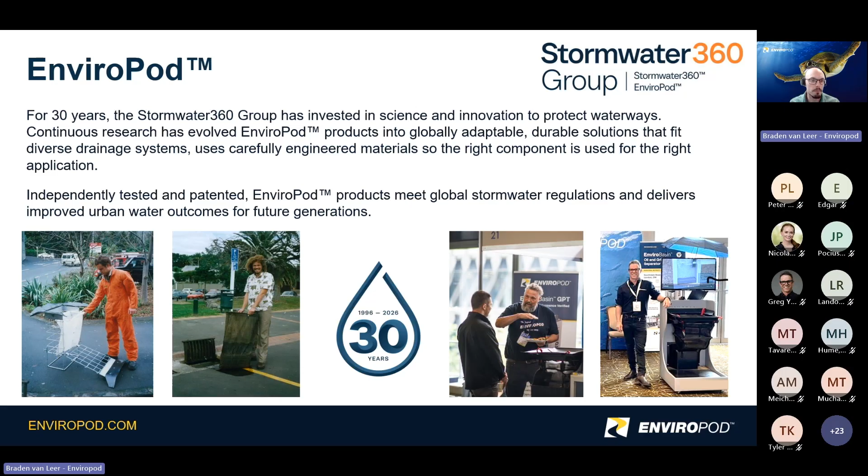And so just a bit about me. I love hanging out in nature, and growing up in Utah gave me a real appreciation for our environment. In my early 20s, I made the decision to go and study in New Zealand, and in my last year of study, I landed an internship with Stormwater 360, which is part of the Stormwater360 Group. As part of the internship, I counted all of the trash that was in 34 LittaTraps over the course of an entire year, and that ended up consisting of over 25,000 pieces of trash, most of it being plastics. After my internship, I got to stay on with the company, and I was designing systems in Australia, Canada, New Zealand, as well as in the US, primarily in California. But now I'm located here in Southern California, and I've become a sales engineer, and I've had the opportunity to work with a lot of great people in a lot of cities since.

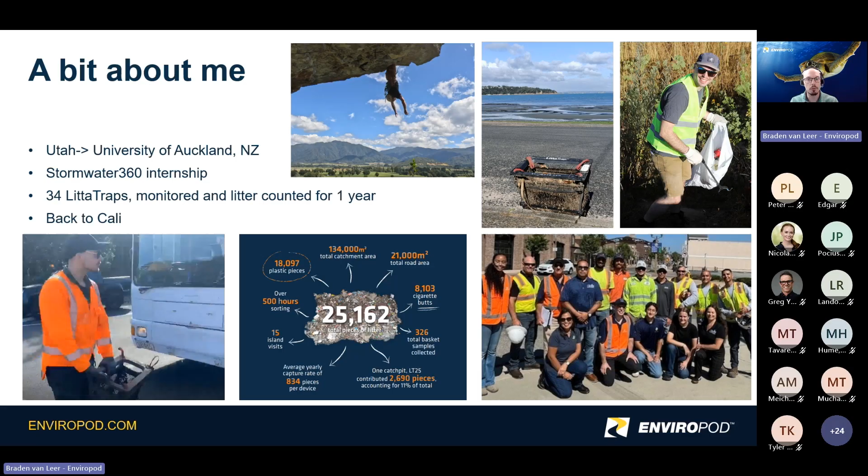But now, so as we start, we want to get into a little bit of regulatory context. A little bit dry for these first two slides, but we'll try and just get through it. But I just want to make sure we set the ground rules properly.

Most trash requirements, TMDL-driven stormwater requirements are ultimately implemented through MS4 permits. These requirements might start as a TMDL statewide policy, local ordinances, or water board orders, or they can even come through in just local design manuals. But the thing is the MS4 permit is usually the main compliance vehicle, and it sets forth the targets for a specific region. And so for California, the nuance is also very important.

The trash amendments apply statewide after their adoption in 2015, but they're not self-implementing. That means they need to be incorporated into the applicable permits. And according to a report by the California Stormwater Quality Association, while many cities are on track, some MS4 permits have not still fully incorporated the trash amendments. And that kind of creates a bit of an uncertainty as to how exactly they're going to comply with this.

Upcoming 2030 deadline. And so part of why I bring this up is, this kind of pressure can lead to quick decisions by municipalities that might not be in the best long-term interest for permittees, and that's kind of why we're doing this webinar, is we're trying to make people aware and give them that information so that they can make sure that they're not saddled with something that's not going to be in their best interest.

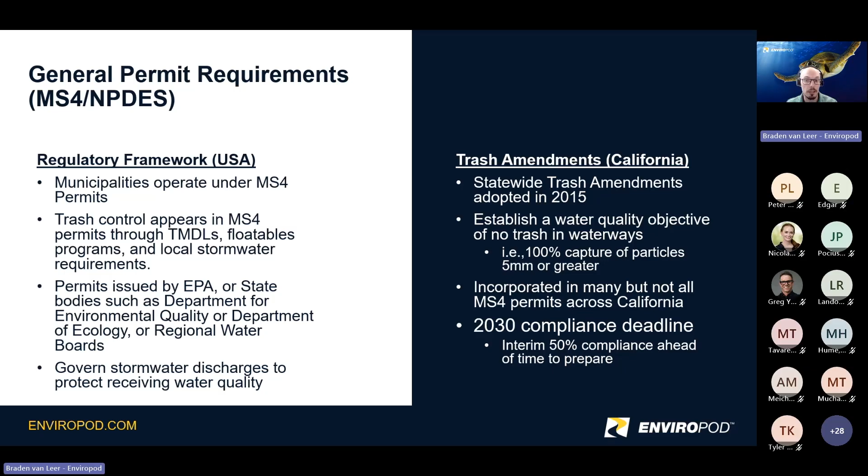And so while many of the California MS4 permits are moving towards regional watershed-based frameworks, there are still differences in how those requirements are achieved. If you can look at Los Angeles and San Francisco Bay, they were early adopters and are now generally understanding and used to the requirements, trash capture requirements under the regional permit. Whereas Santa Ana and the Central Valley are kind of following in the same direction, but they're not quite at the same pace as them.

And they're moving into that regional permit, but for different reasons. So Santa Ana is trying to unify 3 county-based permits across a heavily urbanized watershed, a single urbanized watershed, while Central Valley is using a broad region-wide permit. This way, it creates consistency and flexibility across a very large and varied inland region with a lot of, there are some big cities, but there's also a lot of farmland and rural areas to consider.

And so kind of with this move to regional permits, or with looking at these regional permits, it's good in that it can make trash capture requirements more consistent and easier to document. But it's also good to note that they do raise expectations around planning, monitoring, adaptive management, and long-term maintenance records, which is generally good, but it can be a bit administratively heavy when you're getting that set up.

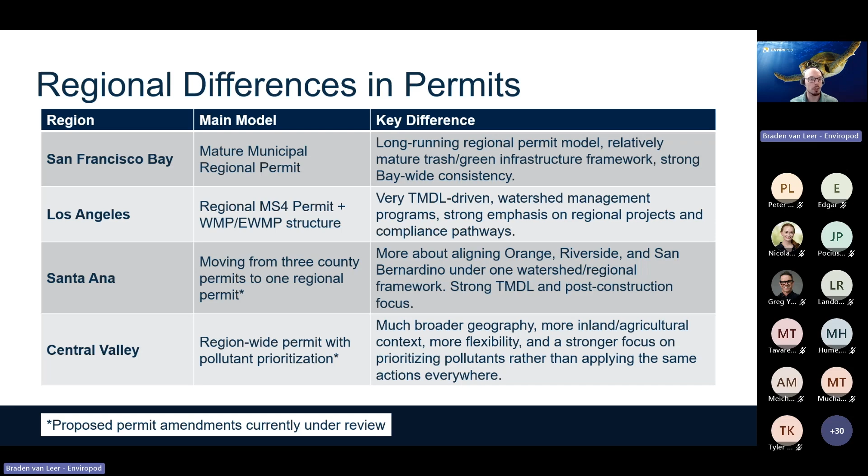Part of the benefit of aligning cities within the same watershed is that the expectations are the same, so you don't run into a situation where one area with a loose or ineffective plan isn't capturing what they're supposed to, and it actually ends up adding the load to somebody else downstream.

And so with this in mind, how do cities typically comply with trash capture requirements? With the trash amendment in California, they're split between track one, which involves using only full trash capture certified systems in medium or in moderate, high, and very high priority land uses that are maintained yearly.

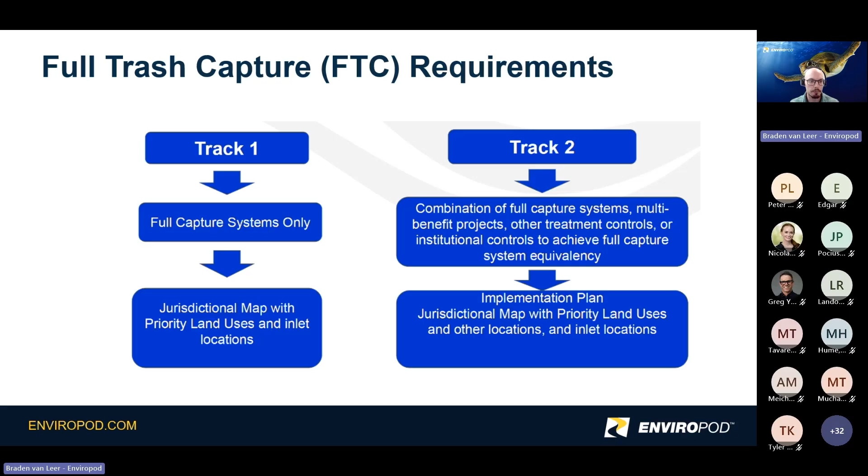Looking at the different full capture device types, there are a lot of different full trash capture devices available, from large end-of-line systems to catch basin inserts like you can see here below. As most cities have their high priority land use areas in existing sites and infrastructure, retrofitting catch basins is often a lot more practical than finding a road that you can dig up to put in a large end-of-line system. And so with this in mind, we are focusing on projects and bids that are utilizing at-source solutions today.

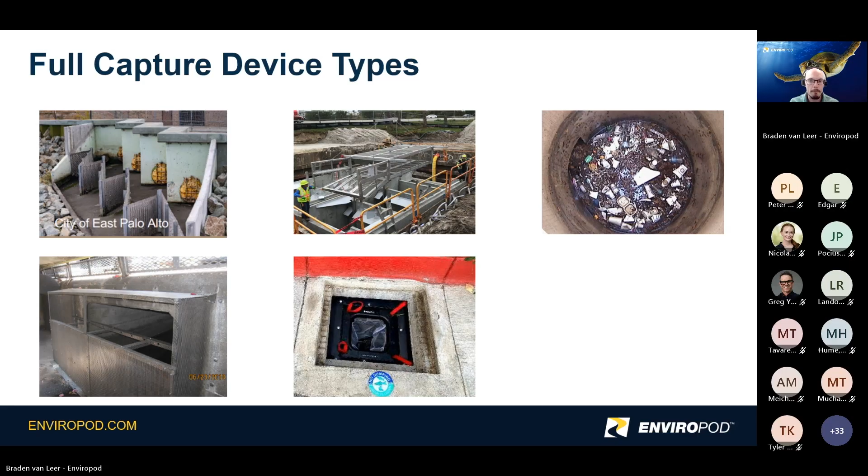Just to clarify a bit more, at-source treatment is defined as just that, treatment at the source. The reason why we here at EnviroPod like it is because this means that the devices are placed in catch basins and they take rainfall runoff and capture pollutants before they get downstream.

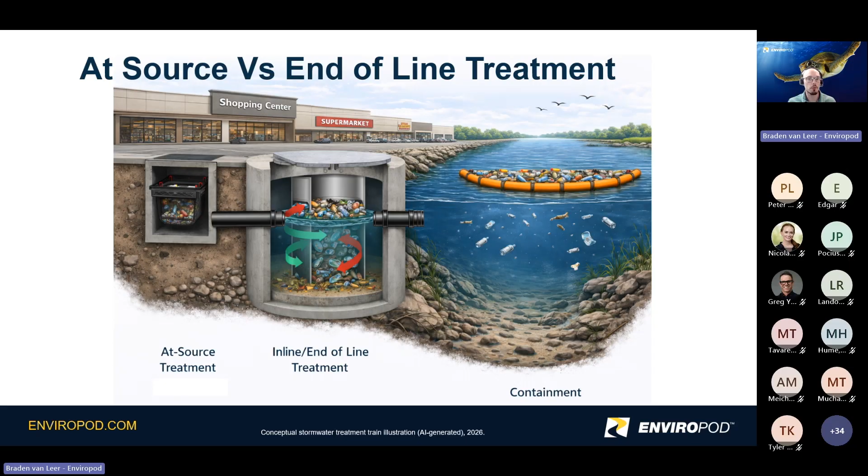While there might be some perceived benefits of end-of-line systems, one of the key differences between these devices is at-source treatment captures material and holds it in a dry environment. We know that when materials are in a wet environment and it's churning and running into each other, it breaks down, and then you can lose it downstream. Also, as you can see illustrated on the right, a lot of material and plastics don't float, and so some systems just won't target a large portion of trash that might be hiding just underneath the surface.

While at-source treatment devices might seem very simple at first glance, there are a lot of considerations that need to go into the design of these products to ensure that the best outcomes and the lowest whole of life cost for these devices is achieved.

It all starts with regulatory compliance. It's a bit of a given since that's kind of the reason why a lot of us are doing anything at all. But hydraulic capacity is a part of those regulations, and it is often overlooked during trash capture projects. Making sure that the devices work to this hydraulic capacity is also a key thing relating to the trash retention, making sure that the devices can actually hold on to the material that they're capturing in typical runoff events. The devices, of course, also need to be able to fit within the inlets and be able to be maintained, and the catch basin needs to be accessible for other maintenance operations down the line.

When you put all of this together, it eventually conglomerates into a durability and life cycle value. So, again, I'll probably say it quite a few times during this, but the whole of life cost is key. You want this project to be successful for years to come because you're going to be maintaining these a lot longer than after they're installed.

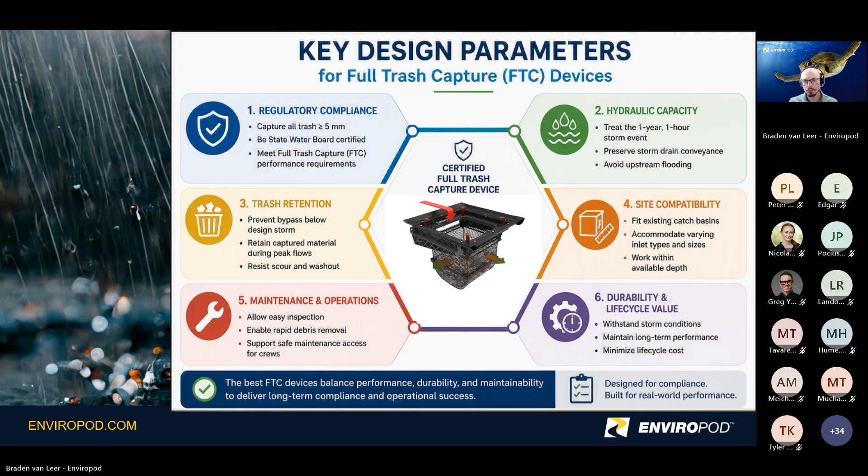Looking a little bit closer at the hydraulic requirements, the California Water Board requires that devices installed in catch basins can capture the 1 year, 1 hour storm. You can think of this kind of like a benchmark storm. Engineers need consistent ways to compare devices, so regulators use what they call the 1 year, 1 hour storm. It's not literally a storm that happens exactly once every year. We know the weather is known for being very unpredictable, but it does mean a storm of that intensity has a roughly 1 in 1 chance of occurring in any given year.

So for trash capture devices, the state water board specifies trash capture flow rates, but it actually doesn't account for peak flow conditions. There's a lot of variability in how manufacturers calculate trash capture flow rates as well as bypass flow rates. So if you have sites that are already prone to flooding during large storm events, you're really going to want to pay special attention to how these devices function and how their flow rates are derived.

If you want more information on this, as well as a bit of a better understanding of how flow goes through these devices, we do have another webinar saved on our website called Standardizing Trash Capture for Resilient Stormwater Infrastructure. It's a very wordy way of just saying that we've looked at the different ways that people can measure flow rates for devices, and we've found which ones we think hold the most true to real world conditions.

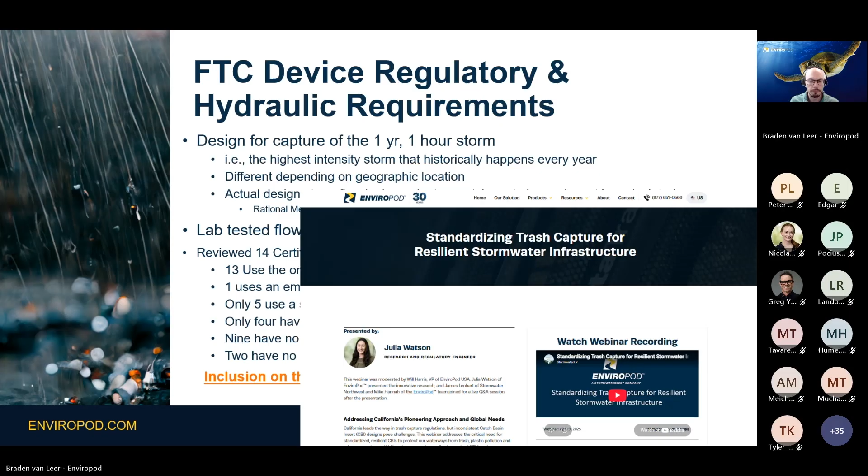So after looking at devices' claims for treatable flow rates and getting an idea of the bypass flow rates that are required, we need to look at the trash retention of the devices.

The water board requirements are such that we cannot have trash bypassing below design flows. This is also heavily tied to maintenance intervals, as a device at capacity will bypass at any flow rate.

And so typical design flow rates are calculated assuming the device is half full. In California, that's a typical thing you'll see on the specifications. But in some situations, devices will bypass before then.

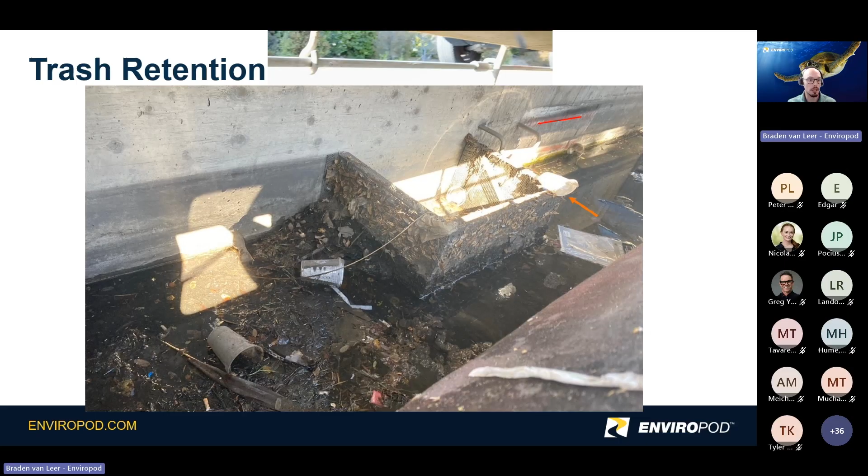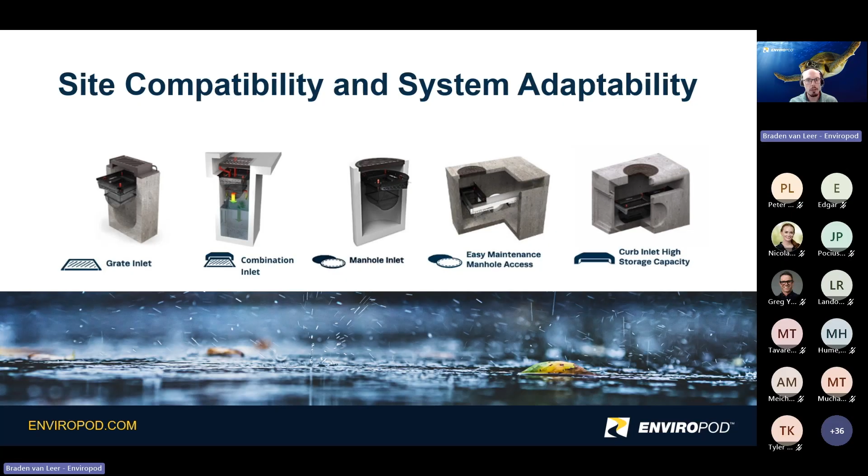So what's an alternative to those devices? There are a lot of different inlet configurations, so having products and configurations that can fit into a variety of inlets is key, because older infrastructure can be very, very interesting.

And so, as we saw previously, considering how trash capture devices are going to be maintained once they're installed, that's also very key.

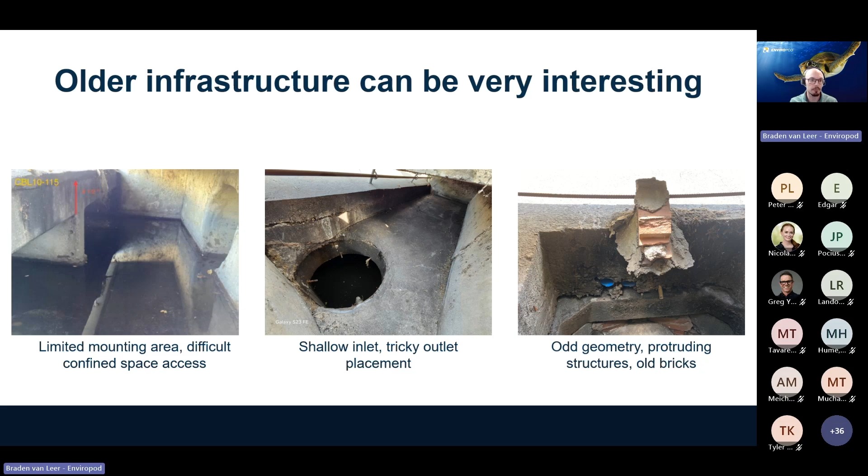For catch basin inserts, depending on the catch basin type and the type of filter or screen installed, you can either have hand maintenance or vactor maintenance. The time it takes, the personnel required, expertise, and therefore the overall cost of maintenance activities can vary greatly depending on the inlet access and device type installed.

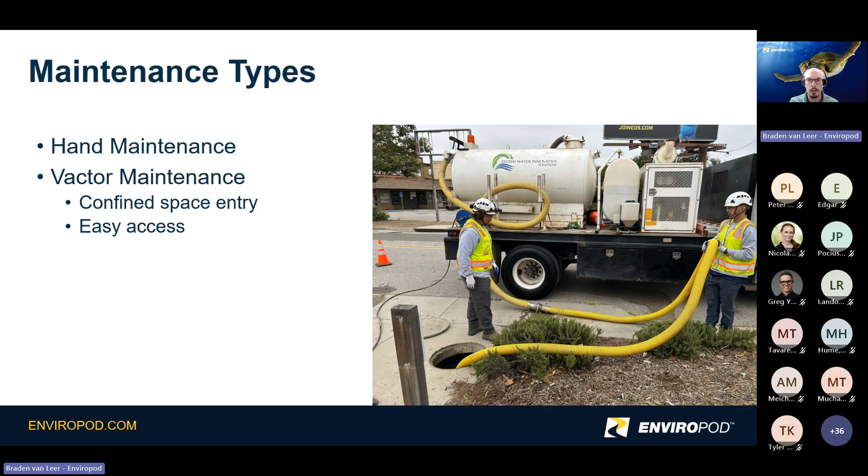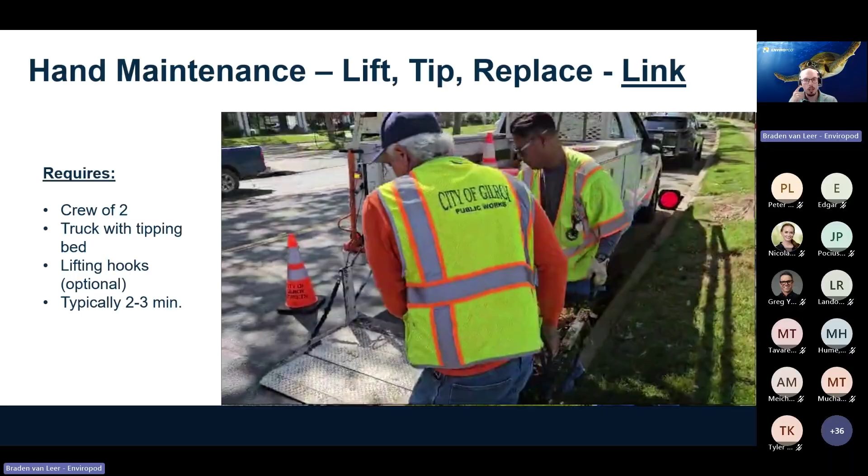Some basket style devices can simply be lifted out of the catch basin by hand, and then the contents tipped into the back of a truck bed, as you can see here. When this is available, it's an ideal situation because we all know Vactor trucks are expensive to bring to site and to maintain, and cities sometimes need them for other more important things, since trash capture is just one facet of what a public works team typically does. Most cities will have plenty of access to trucks and a couple guys who can lift something out of the grate.

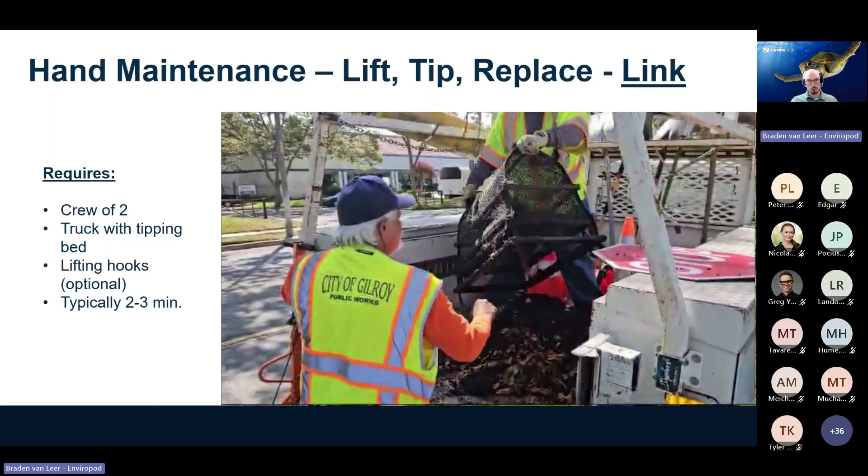To look at the timing for this, a while back we did a maintenance time trial where we looked after 34 hand maintainable units, and it only took about 2 hours to maintain them, scattered across the city. Some of the baskets weighed approximately 80 to 100 pounds of wet sediment, so it was a two-person lift, but the maintenance itself was very simple. You park in front of the catch basin, place the cones, lift the grate and the basket, tip it out, and replace the basket and grate.

In a lot of areas, if the time at the inlet is short enough, traffic management might not be required - you just put down a couple cones and away you go. But as with the real world, not all inlets, especially the large curb inlets we see in Southern California, will be hand maintainable from the surface. There are still considerations to making it as easy and as fast as possible.

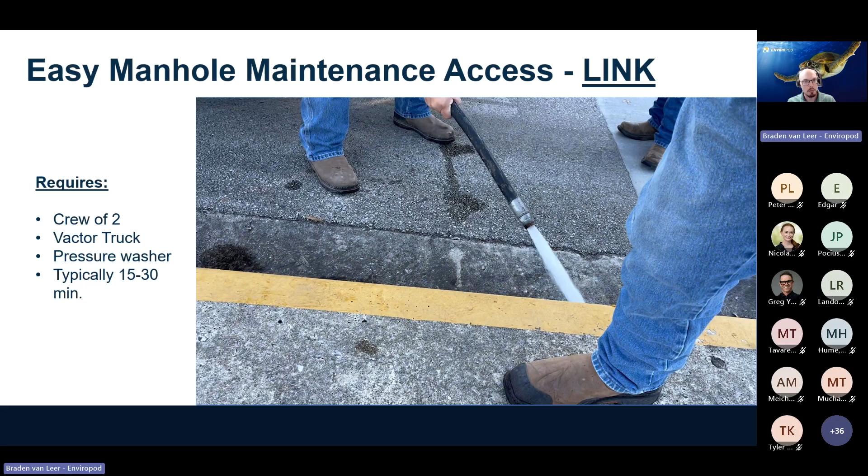In larger curb inlets, hand maintenance is often impractical unless the maintenance hole opening is quite large. One way to make sure maintenance is really quick and easy is to utilize devices that accumulate debris directly under the manhole opening, as you can see here. You can see the boom inside, and you can barely see the basket inside, but it's directly underneath the manhole opening. Either doing that, or making sure that whatever screening device is installed can be removed from the inlet by hand once maintained.

Because a lot of times with leaves and grasses, it'll break down and stick to the sides, you might need a loose fabric that can be shaken to break it loose, or you might have to remove the whole thing and give it a proper scrubbing to make sure it's not bypassing.

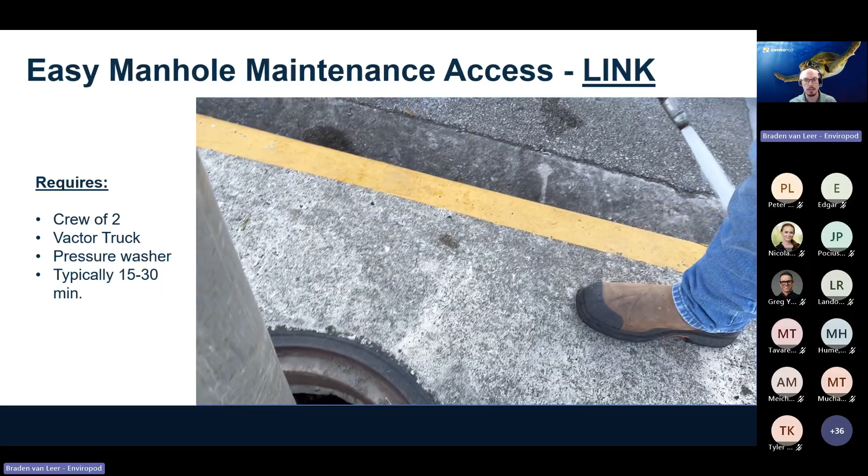One of the key things to look at here is that it only requires a crew of 2, a Vactor truck, and a pressure washer, and from our maintenance demonstrations, it's only taken about 15 to 30 minutes to maintain these devices.

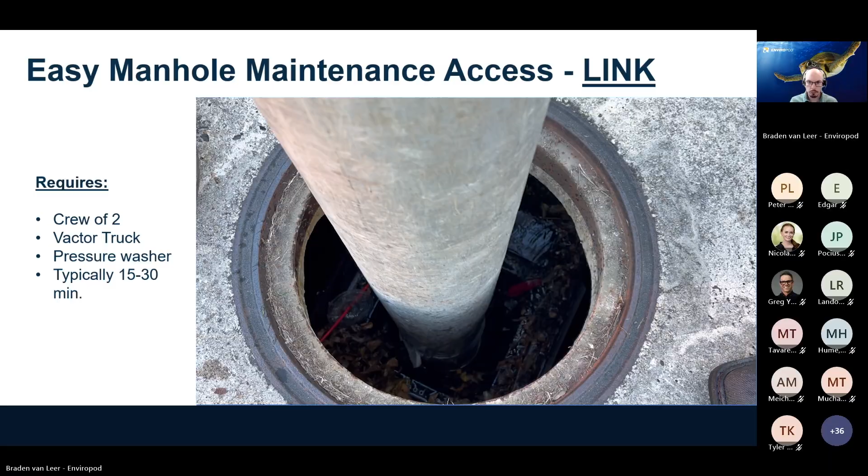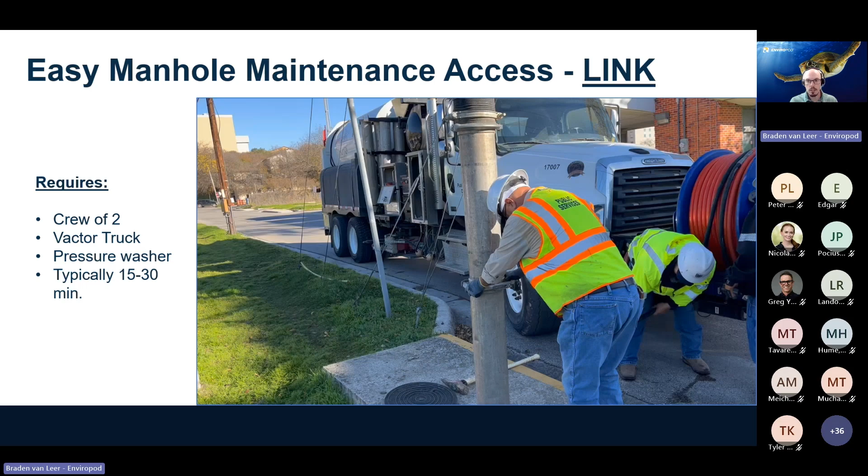From a similar project that we've done, at prevailing wage rates and disposal, we've gotten information that this location would be about only $135 to maintain. Pricing changes with quantity and the size and type of catch basin, so if projects have more locations, they can often reduce pricing per catch basin as long as they're all nice and easy to access.

So conversely, the most involved method of maintenance is the confined space entry type. Entering a catch basin is typically going to trigger confined space procedures, especially where there's limited access or poor ventilation, water, sediment gases, or restricted rescue access. Many of these conditions are very typical for catch basin maintenance activities.

Compared to that last slide, just having one person on site for an hour who is confined space certified, you're probably going to be looking at the same cost as the whole maintenance for the previous inlet - not including the extra two people and the cost of the Vactor truck.

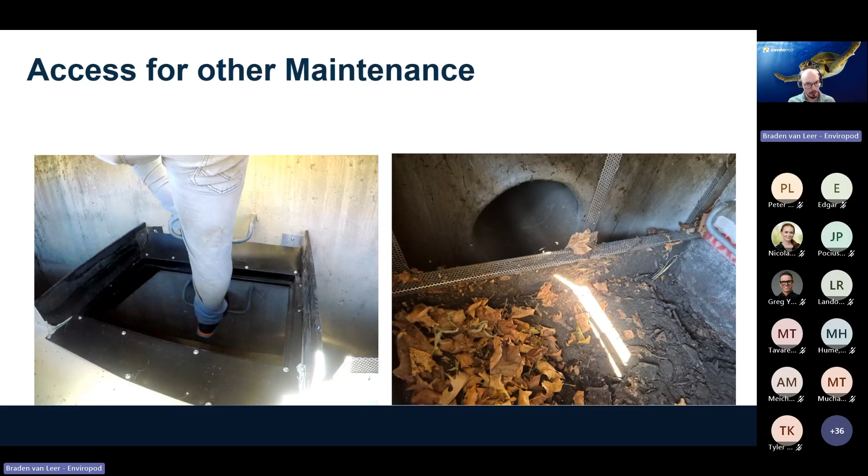Whereas, say, a screen in front that is bolted to the walls might be very hard if you have to clear a blockage from the outlet.

To tie all of this together, the function, installation, and maintenance considerations of a trash capture device are typically the main concern. But when these costs are extended across the service life of the device, the true value of the specific device can be figured, the full life cycle cost.

Since life is also what happens after we make plans, we need to plan for contingencies. What happens if the units are damaged, vandalized, or stolen? How is it going to be taken care of? Do the devices require full replacement, or will they require intensive repair on site? Or are replaceable components available? And what's the warranty and the conditions of that warranty?

If a device is very low cost to install but is only warranted for 3 years and requires very expensive maintenance, confined space entry, then the life cycle cost is going to be a lot larger than a device with, say, an 8-year warranty, such as ours, that has a slightly more expensive supply and installation.

I won't say that we're more expensive for supply and installation, but we do have an 8-year warranty, and the thing we really focus on is very simple maintenance, so that no matter what, when you're looking at these devices for the next 10 years, maintenance is very low cost and easy to do.

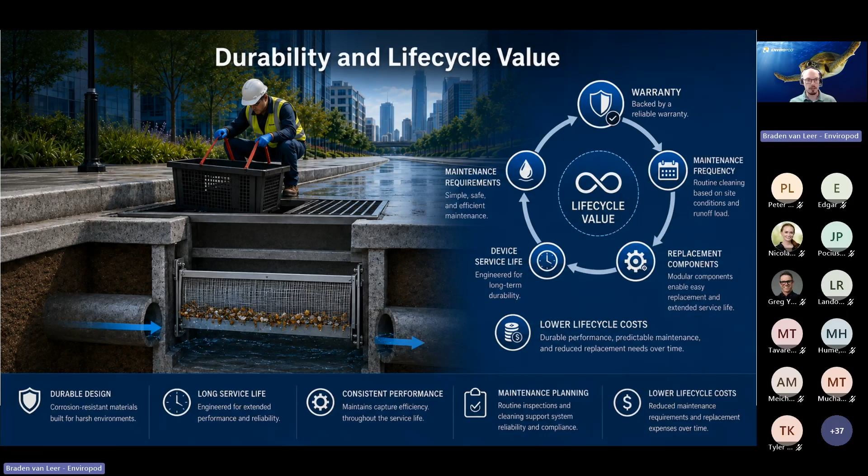Now that we have an idea of what to look for in our devices, we can look at how to implement them. We'll be looking at bidding requirements as well as best practices and other pitfalls to look out for, as well as some real world projects that I've been involved in myself.

Starting with the bidding and procurement process, this is about how cities move from compliance planning into procurement. We'll take a quick look at competitive bids versus sole source, as well as some guidance on specification, drawings, and submittals.

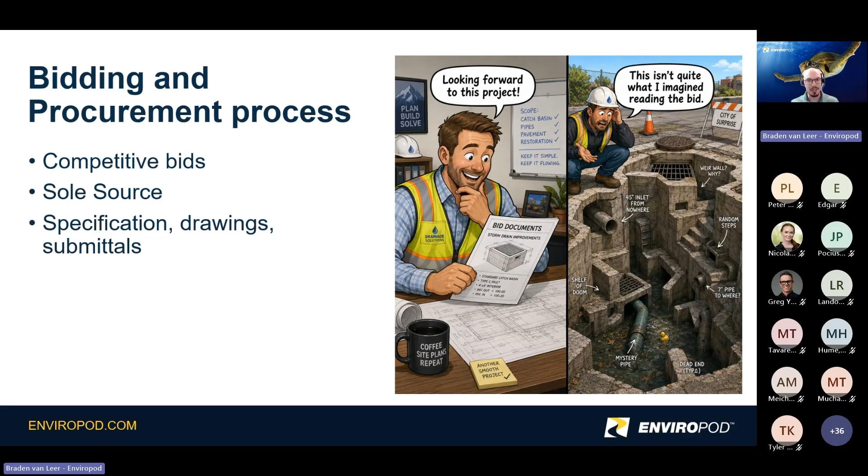So unlike this image, we can set up our bids to be successful well after the project finishes.

Starting with competitive bids, those are the most common way that municipalities will procure trash capture devices. A competitive bid works best when the city defines the outcome clearly, provides good inlet information, and lets qualified bidders propose compliant solutions.

But to counterpoint that, strong bid documents upfront really help make sure that the upfront costs don't get in the way of finding the best product for the city.

Again, we have to have everything installed within the next 4 years, up to 2030. But that means from then on, if we are completely installed, we're going to have to maintain those. So low install costs alone shouldn't be the bottom line.

So on the other side of it, sole source comes along when there's a specific requirement that a city needs, such as quantitative removal results or unique site constraints. A sole source project also needs to show why that specific solution is necessary and not just preferred. For instance, if a city can get additional credits for sediment or nutrient removal with their trash capture device, third-party testing data showing these removals are possible could potentially be a reason for a sole source specification.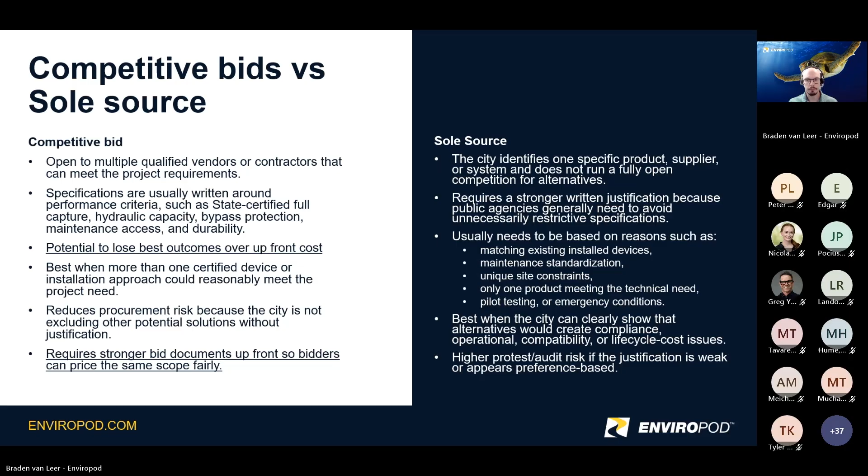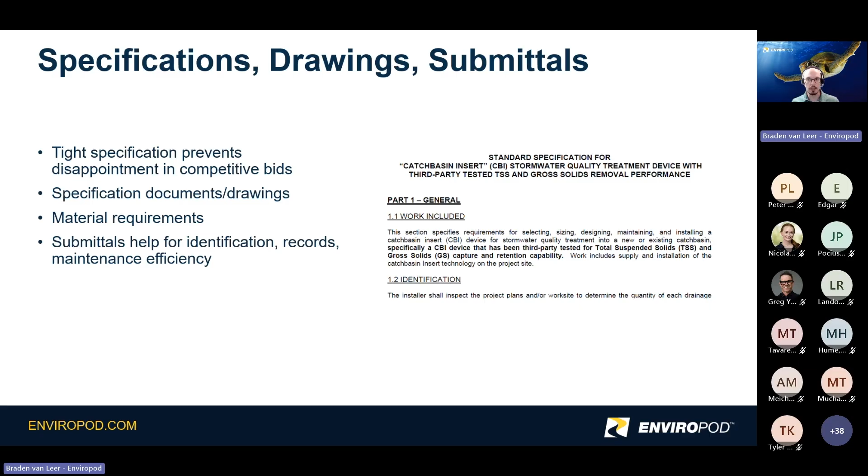A competitive bid allows pretty much anyone to come to the table, which is great for fairness and competition. But there's a lot to consider, and it can be easy to miss things when comparing a lot of different products. Generic specification drawings or documents calling out key requirements can be very helpful to prevent ambiguity, and considering material and submittal requirements can also set you up for good experiences after the initial project is completed.

Here we can see an example of a grate inlet with a curb entry specification drawing for a trash capture basket. Note that in addition to the drawing, there are also written specifications for things like basket weight and removability to help make sure that maintenance is easy, as well as any regulatory and flow requirements such as vector access or lab testing, just to make sure that for your specific site, you can be confident that the device will convey flow properly. There can also be material specifications which ensure longevity and robustness.

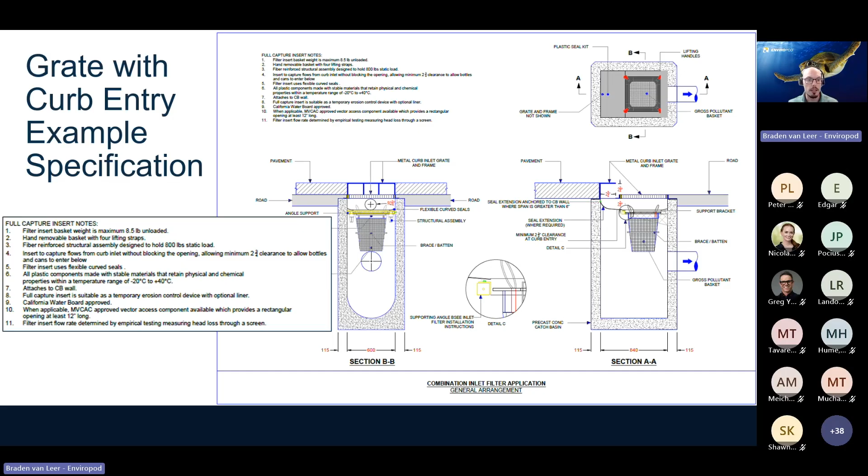Here's a similar example, but this one is for a curb inlet with easy manhole maintenance specified. You'll see a lot of similarities between it and the previous arrangement, but the key difference for this drawing is that the filter is called out to be located under the access opening. What this does is give a visual indicator to the bidding contractor that the city expects to maintain these devices without having to enter the catch basin. These drawings, as we've seen in practice, are a really good visual example of best practices, and so it kind of prevents ambiguity.

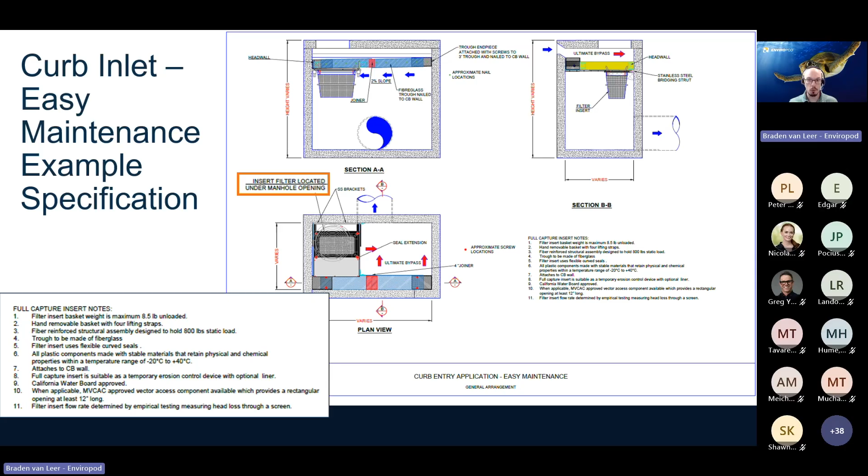But there are also some other different levels of specification requirements that we will look at. For these next few slides, again, there's a lot of information coming up, and for the sake of time, I'll be going through quickly so that we can actually see these items more in a real life case study.

But again, if you want the slides or watch the recording after, these are available for a bit more in-depth instruction. When you're looking at the pre-bid or essentially the site information for a project, the more information that we can get up front, such as inlet photos, measurements, or site constraints, as well as any existing devices that may need to be removed, it's incredibly helpful to make sure that contractors can bid appropriately.

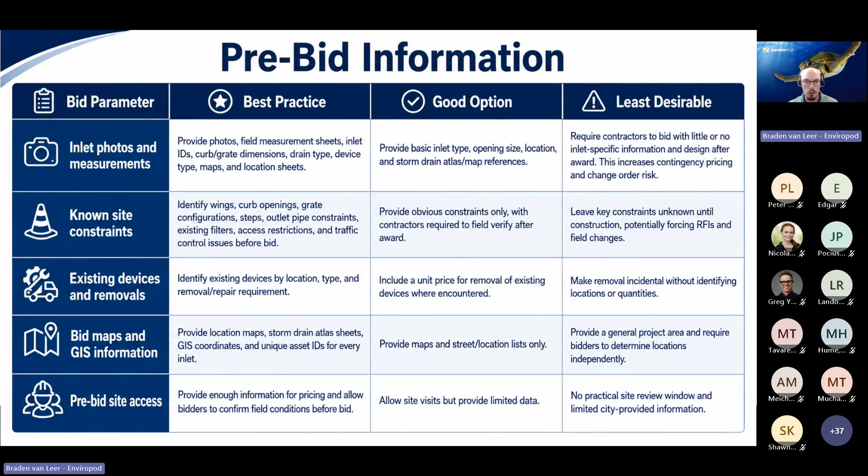When there's insufficient pre-bid information, contractors have to make their best guess, and they either put extra fat into the bid, or on the other side, they bid very low and then just have to ask for a change order when something comes up that they couldn't plan for. This can create unplanned costs and add time and uncertainty into those project completion timelines.

Good device and material selection is about avoiding a purely lowest cost device mindset. For full trash capture retrofit projects, the device does need to be certified, but it also needs to fit in the inlet, needs to handle the required flow, and above all, it needs to be practical to maintain. For some of these items, reliance on good pre-bid information is required.

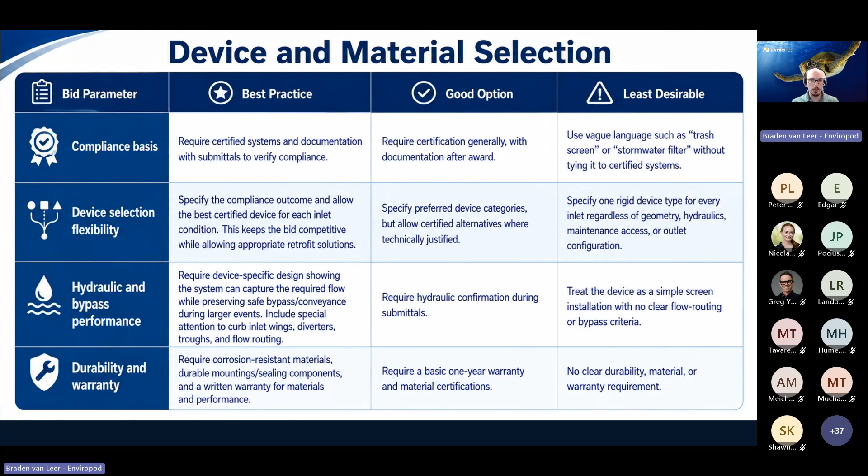The best specs are going to focus on performance, as well as hydraulic and bypass capacity, corrosion-resistant materials, as well as warranty support for whatever can happen on site. A good bid can still allow flexibility, but the least desirable approach is vague language or forcing one type of device into every catch basin.

With installation and maintenance parameters, they build on device selection by showing why installation and maintenance details need to be defined before award. Even a certified device can create issues if the contractor goes into installation blind, as they will often try to make installation work with what they have, rather than considering maintenance or access implications down the track. Best practice is verifying every structure before fabrication, defining cleaning and disposal responsibilities, and making sure maintenance crews can actually inspect and service the device safely. Don't assume every contractor will work to an appropriate safety standard. You do need to include that as well.

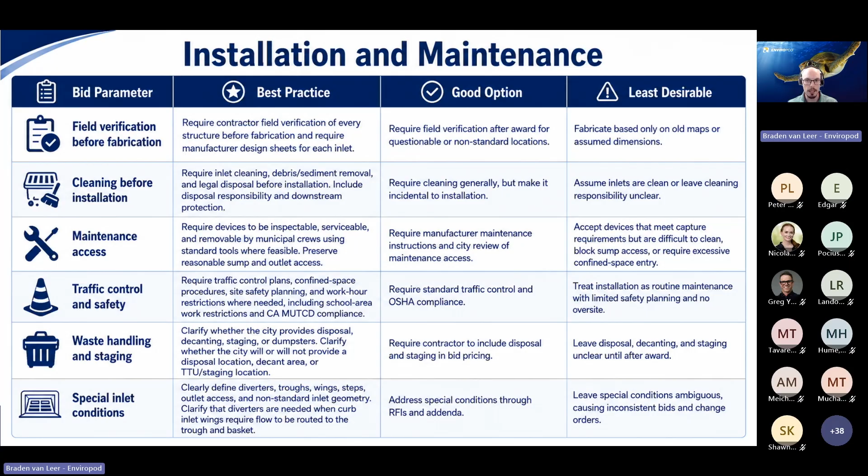Then from there, we need the post-project information. As you can see with moving to those regional permits and there being a bit more stress on reporting, making sure you get appropriate installation documentation, getting inspection and verification that the devices are installed and installed correctly, and making an inventory of those devices just helps make sure that for whatever your reporting requirements are, you're not going to have to go back out and do it yourself separately. Whereas if you can take care of it as part of the installation process, it'll be a lot quicker.

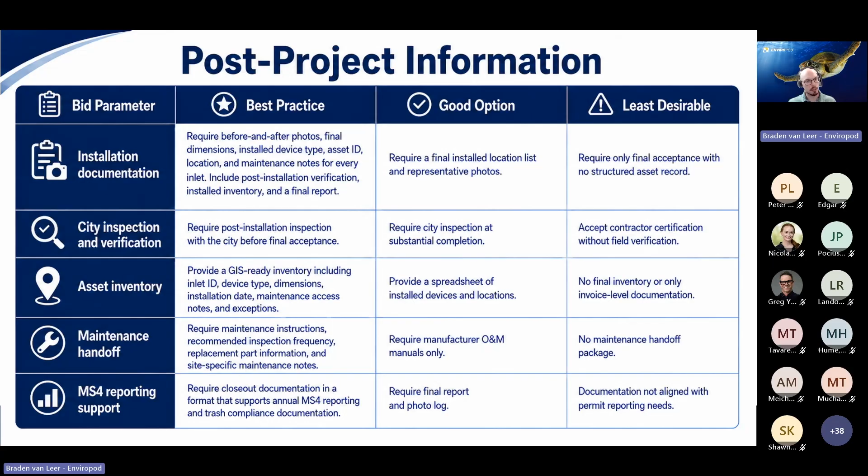To tie it all together, this is kind of a general workflow for projects in terms of best practice, good options, and what is least desirable. Depending on the information readily available and the specifics of your project, you can use a mix of best practice and good options, but you really want to avoid the least desirable ones. A lot of times it'll set you back, or you kind of run around in circles until you have enough information that you can actually go and put in a good bid or finish the actual project.

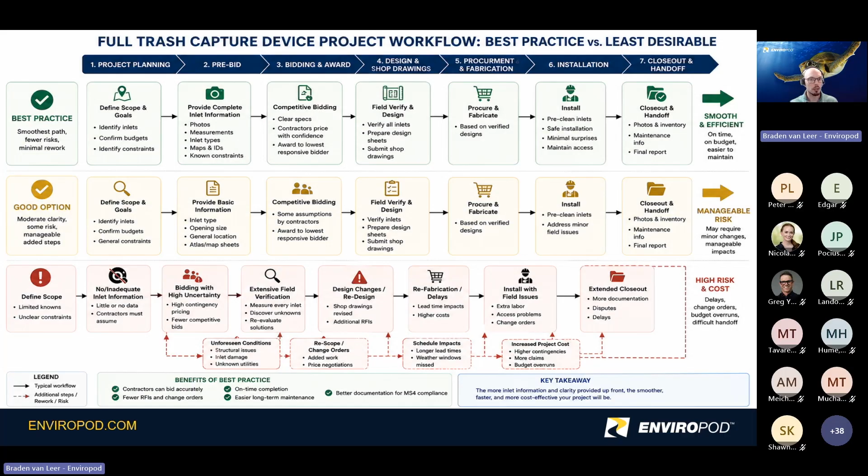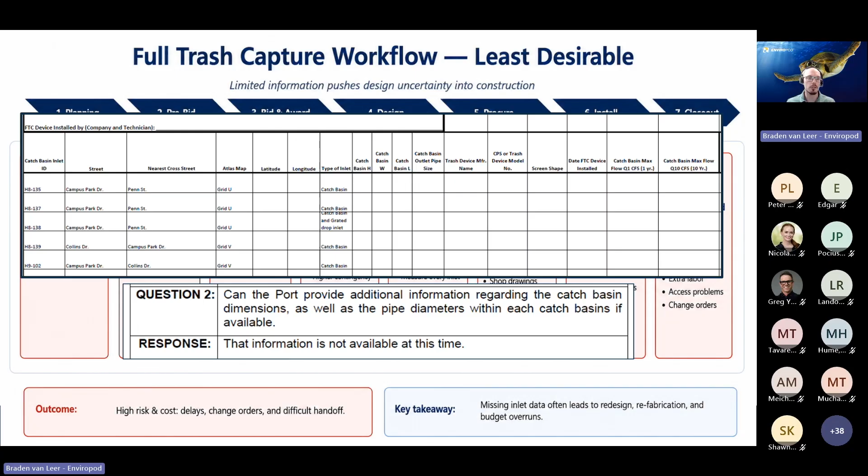Now it's time to look at some case studies that have gone pretty well. Before we get into that, in a lot of cases, municipalities in your area might have already conducted pilots or have experience with some trash capture devices. It's a good idea to ask them about their experience and see what feedback their public works teams might have, and take that into consideration when you are selecting devices. We've seen cities provide maintenance demonstrations where they have a selection of devices installed and they invite other cities to come and see as well. We recommend looking into and trying to organize those if you can.

Outside of that, a lot of cities do tend to want to have their own pilots. And while most manufacturers are happy to help, pilots do last 6 to 12 months, so they aren't great in a pinch, but they can be really beneficial for helping your public workers in your city understand the devices and how they maintain themselves.

The first case study we're going to look at today is Thousand Oaks. One of the key things for this project is that cities aren't hiring more people just for the addition of maintaining trash capture devices, so the key thing they wanted was ease of maintenance as well as robustness.

We installed quite a few EMA devices as well as hand maintainable devices. There were 22 inlets total, curb as well as grate inlets, a bit of a mix, and they have old and non-standard drainage. They worked with us while getting ready for the specification so they could make a strong specification and get exactly what they need, and what will be easy for them to look after for years to come.

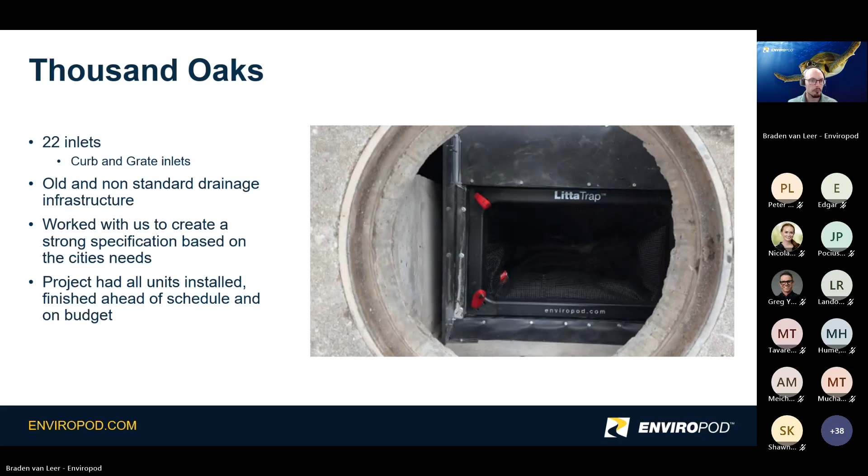The project had everything installed, and they were finished ahead of schedule and on budget. Part of that came again from working with us.

They were also able to give us the best pre-bid information. They gave us measurements of every single inlet, and especially for these really custom inlets like we saw earlier in the slide, they gave specific measurements. That allowed the installation contractor to make a detailed design and plan going in, so they didn't have to come in and wonder what they're going to do and then figure it out. That's how they got it done so efficiently.

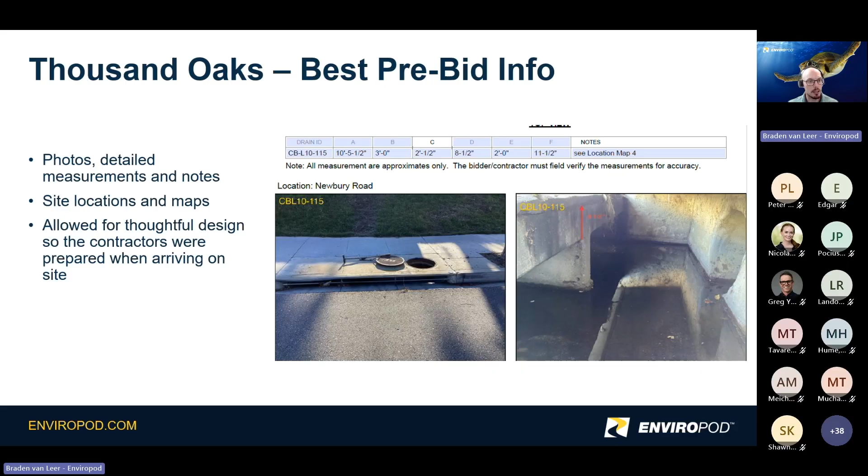Now moving on to a different city, Wildomar. It's a more newly developed city with new infrastructure, a lot of standardized, standard for public works curb inlets. It only had a few tricky inlets out of a total of 49 large curb inlets, up to 28 feet long.

Having a modular device such as our EMA kit made it so they had a lot of flexibility on site and were able to use the parts and components they had. They actually needed minimal information from us to get everything taken care of, and again they were looking for durability as well as ease of maintenance for the project.

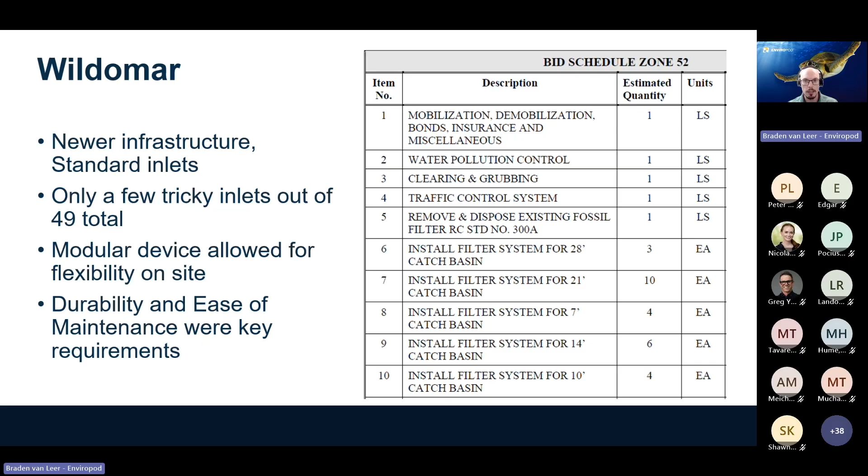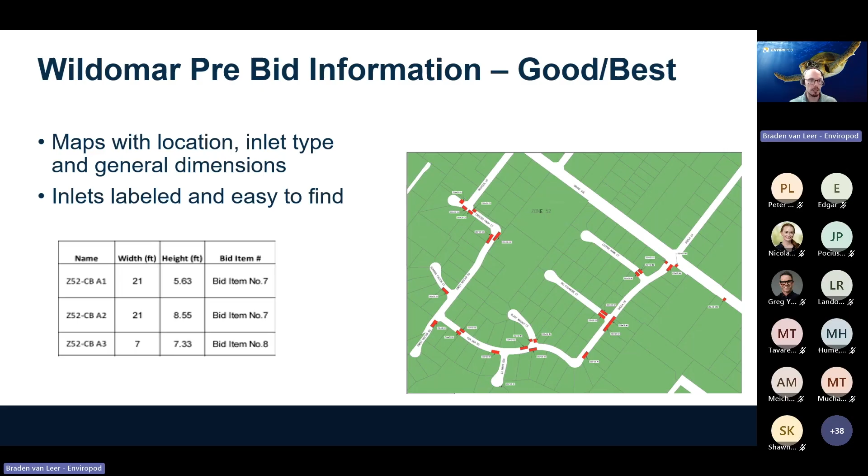Since Wildomar had newer infrastructure, their pre-bid information was on the line of what's good and best from the previous slide. They gave us maps with the location, inlet types, and general dimensions. But since they were all brand new inlets and pretty standard, they didn't need to give us detailed measurements and photos of every single inlet. They did give us enough information so we could quote and bid appropriately, and everything was labeled, easy to find, and easy for us to work with.

For this one, the installation went smooth for those 49 locations. The city had given us 20 working days to complete it, and they finished in just 12 days of effort. They even had a few weddings and other things to take care of in the middle, so it was great that they were able to do that and still smash it out of the park.

The other thing they did is they provided an installation report with images and locations of all the units, so that they could put that into the asset database.

They also added some of our curb inlet markers onto the curb, so that if a public works person is going up to the inlet, they can tell a device is installed in the inlet without even getting in to look at it. That way they know they might need to proceed a little differently than if they're just attending a catch basin with nothing inside.

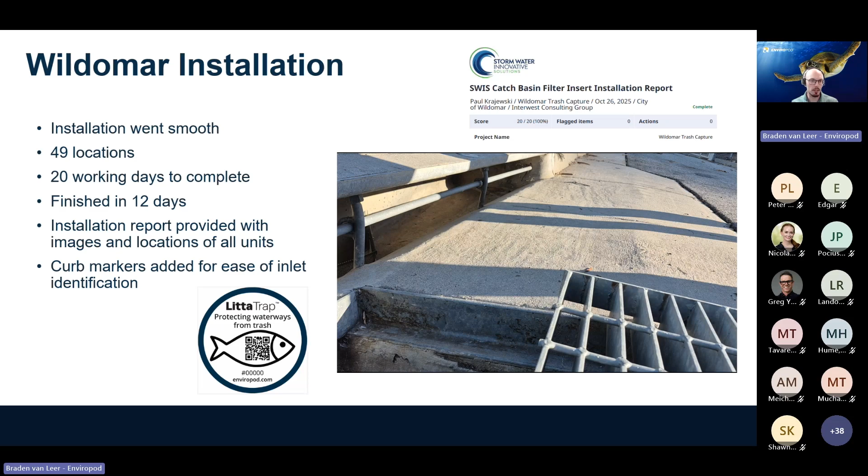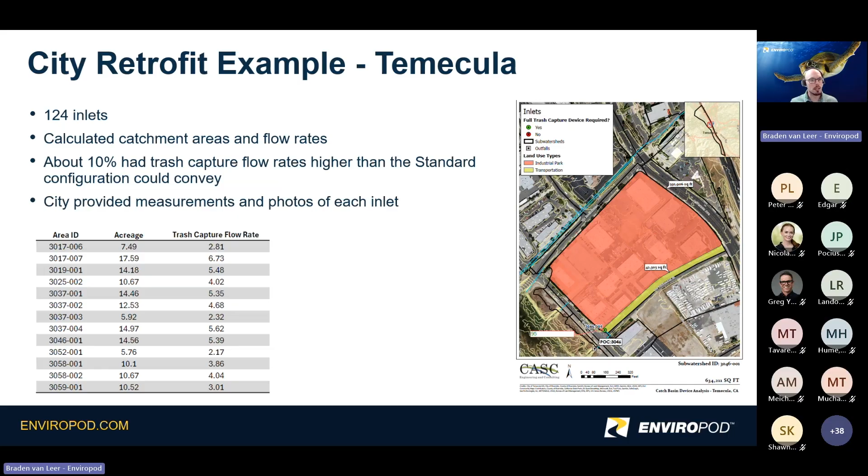Since they provided measurements and photos of each inlet, it made it very easy for us to come up with custom solutions, whether adding extra baskets or changing the angle of some of the flow conveyance components. From there, since we were building that out and working with them, we were also able to help them with their maintenance planning.

We told them these are the devices that are hand maintainable, these are maintainable from the ground. For some with very high flows, there were one or two where it required a bit more involved maintenance, and we showed them how to do that. So when it came down to it, they were able to maintain all of their inlets. They let us know about a month ago that they maintained all of the inlets within a 2-week period, which is pretty incredible.

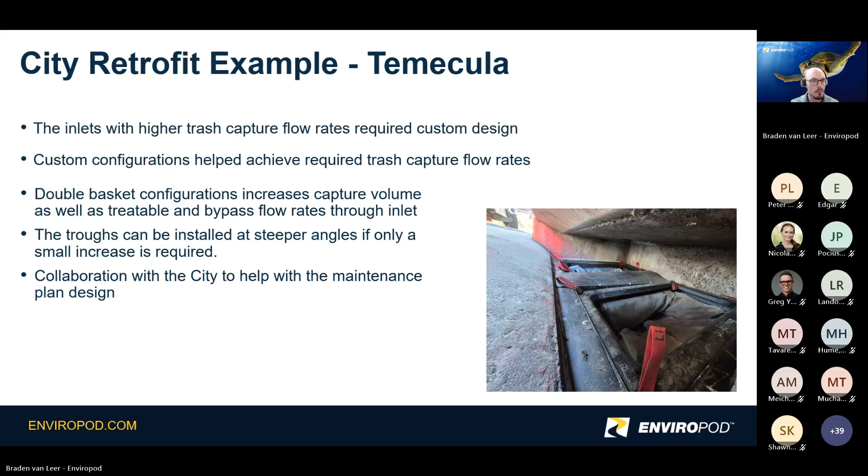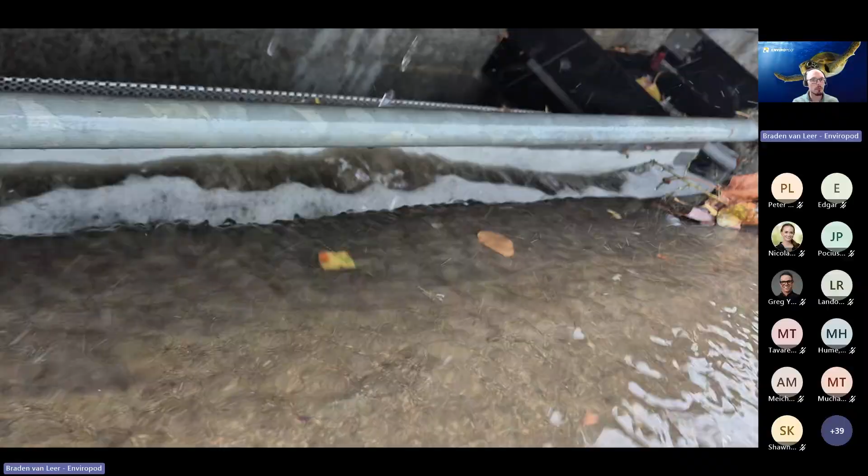Just to show how the device works, this is one of the devices in a 10-year storm flow event. This shows how it's not just a certified device, but also a device that's built properly.

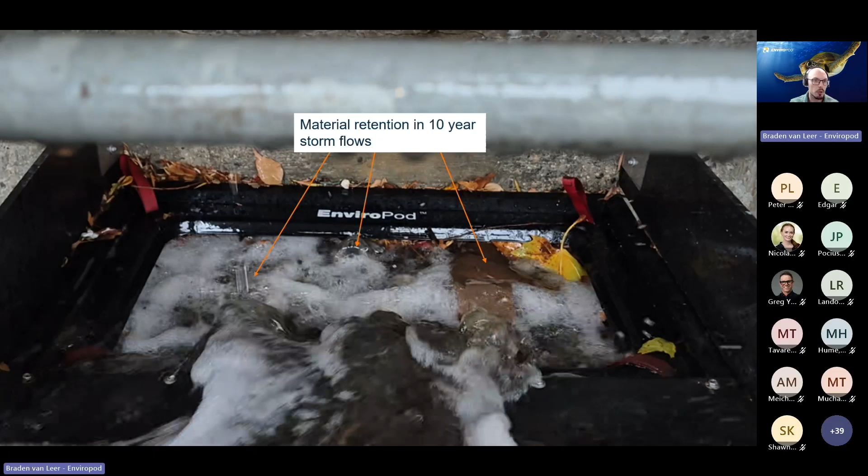You can see there's a lot of water coming in from both sides, a little bit of debris on those screens on top of the trough, and some material here on the inside still being held onto. We've got a plastic bottle, a bit of cardboard, and what looks like a plastic cup, and they're all still being held on. That means they're not bypassing and being conveyed down to become somebody else's problem down the line.

So even though some devices might be certified, it's good to look at other things.

In final summary, we'll get on to some questions. We looked at the regulatory context, regional permit considerations, device types, procurement, pre-bid information, as well as some case studies.

The key takeaway I want you guys to have is that successful projects depend on clear compliance goals, site-specific design, maintainable devices, as well as strong procurement documentation.

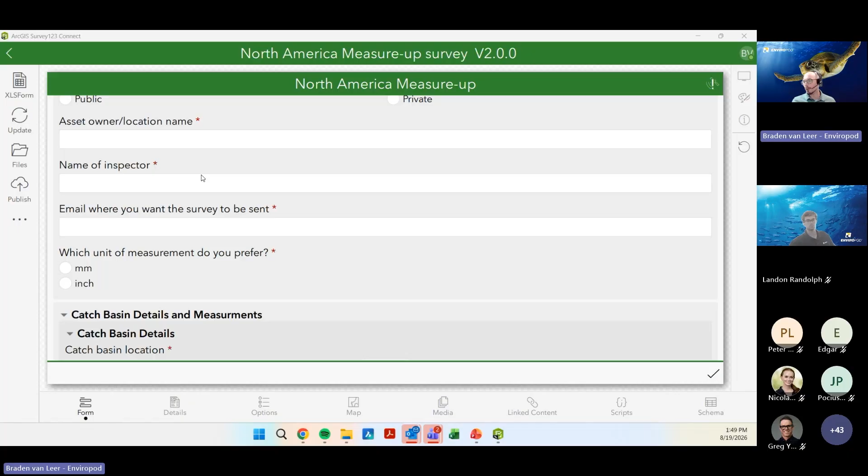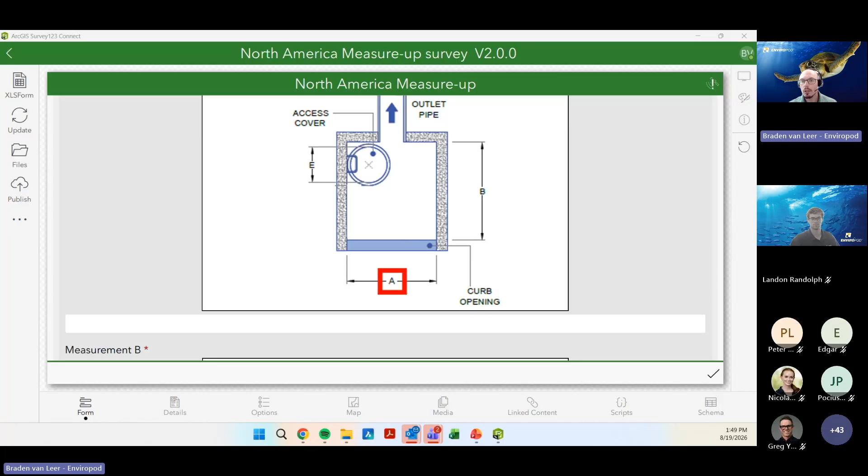One thing I'll show you is, if you have a project or something you're curious about and want our input, we also have a measure up form through ArcGIS Survey123. We can share this with you if you'd like. This way we can get all the measurements, photos, and details of the catch basins. We get measurements based on the catch basin type so we know exactly what we're looking at, and we can give you a good budgetary estimate, as well as let you know what you're looking at. It's an easy and efficient way to get that information for your bids.

Any other questions about the products or anything outside of what we've talked about? Love talking about the LittaTrap. So if you have any questions about the materials or the maintenance requirements, always happy to go into that as well if any of you are curious.

Outside of that, I'll tell you guys, with most full trash capture and Track 1 compliance, you do need to maintain yearly. With what we find with our LittaTrap devices, generally 1 to 2 times a year is all that's required for maintenance, if you have a whole bunch of trees or organics going in.

We would recommend maintaining it spring or fall time, when most of those organics are falling onto the ground and getting washed into the catch basins. But it really always depends on the site. If you have somewhere that's getting a ton of bottles or stuff, say near a stadium, it's going to be very peaky for when it's getting loaded, so you might have to consider that.

But with how we set up everything, and how we try to make sure we give all the information for our devices so they can come up with a good asset register, there's been some cities that have been able to get really good maintenance efficiencies by keeping that in. So there's always a smart way to do things. We're always happy to share that information or get you in touch with somebody else.

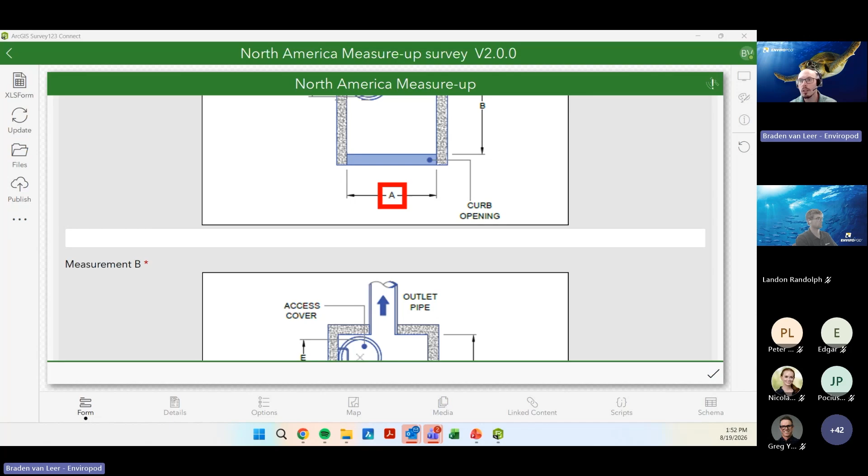Yeah, you can, as you saw both of those. That basket that is maintained within that slide, I'll put it back up on the screen. But that basket is the exact same size for the grate inlet, as well as the same basket size that's used in the curb inlet. And as you'll see there, you have both options.

One thing that's really good to note is that the basket has battens on it, and what that does is prevent the basket from getting sucked up into the Vactor truck. It makes it malleable so it can move around and shake loose any captured material. But if you get a Vactor truck and crank it up on high settings, even with really impacted sediment, that's just fine.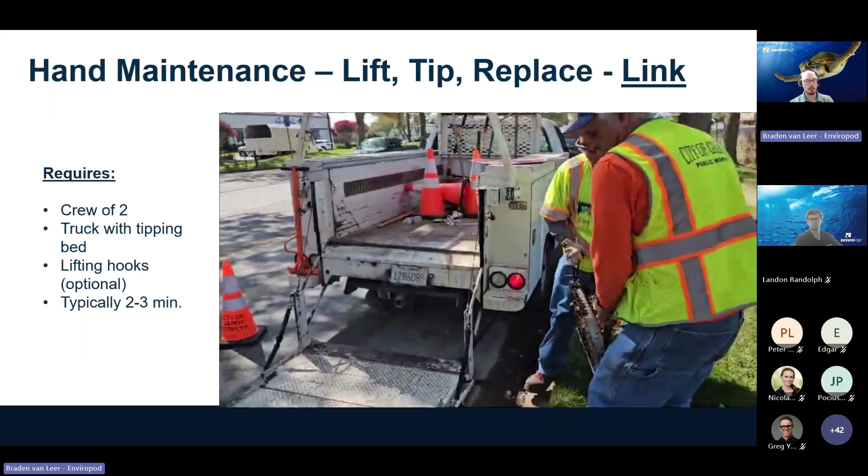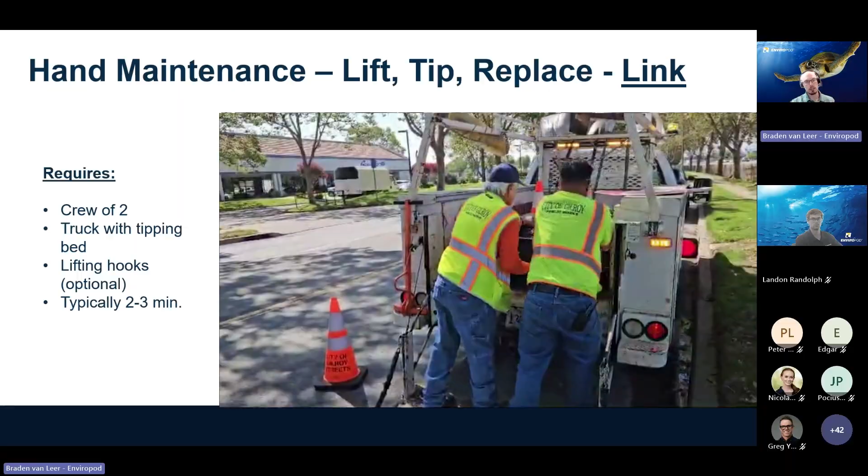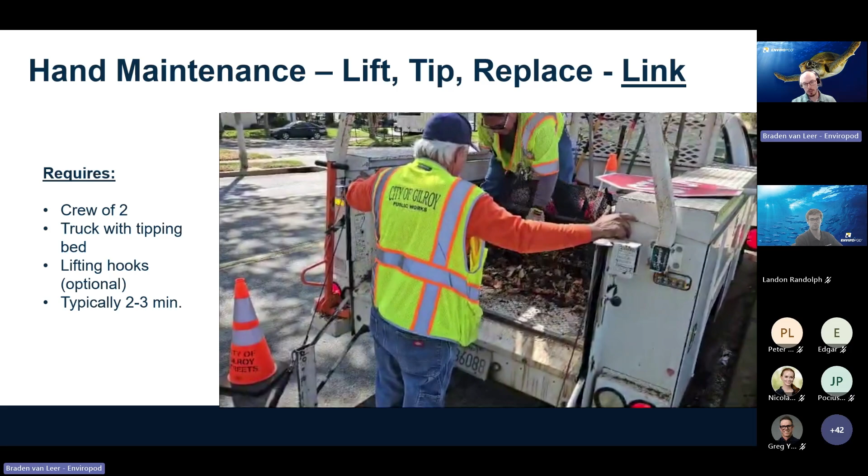If you have any questions about that, Nicola is onto it. That's the construction liner, so that's one of the options.

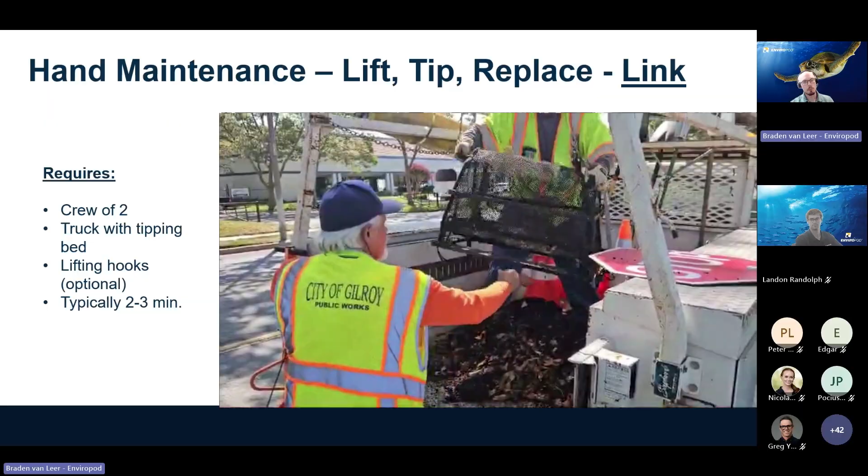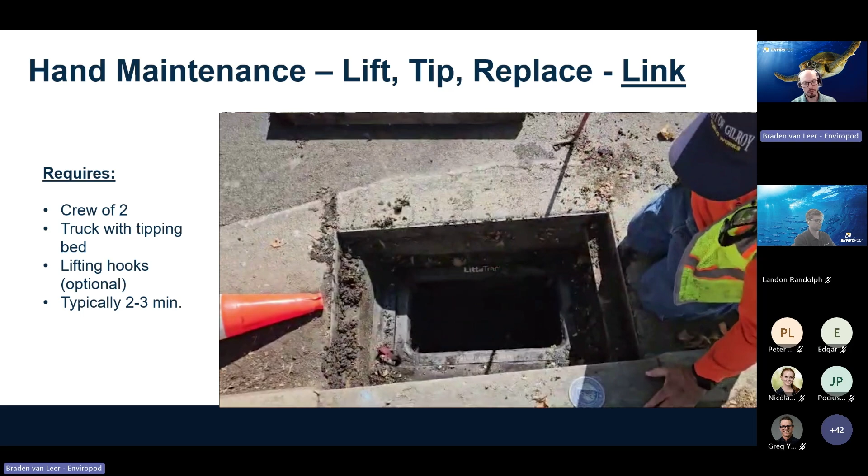We also have another sediment liner if sandy coarse sediments are an issue or something you're looking to capture. We have other liners as well, so if you have a specific treatment requirement, let us know. The LittaTrap can't do everything, but we've tried to make it so that for the right situation it has the right options to help.

Good question from Ken: what is a rough installed price per catch basin? Installed prices are tricky and very dependent on location and number of devices, because there's procurement, but also mobilization and traffic setup. For a typical grate inlet, you're looking at somewhere between $400 to $700 per basket that goes inside, depending on size. Installation for a typical grate inlet is generally about $200 to $300 per unit, plus mobilization, which scales with the size of the project.

For larger curb inlets, they're bigger products so they're a bit more expensive. A 7-foot curb inlet runs about $1,200, whereas a 14-foot is about $1,800, and it goes up with the size of the inlet. Installation for just the unit is generally in the range of about $1,000, and with a good contractor it only takes about an hour and a half to install. So those are very basic figures.